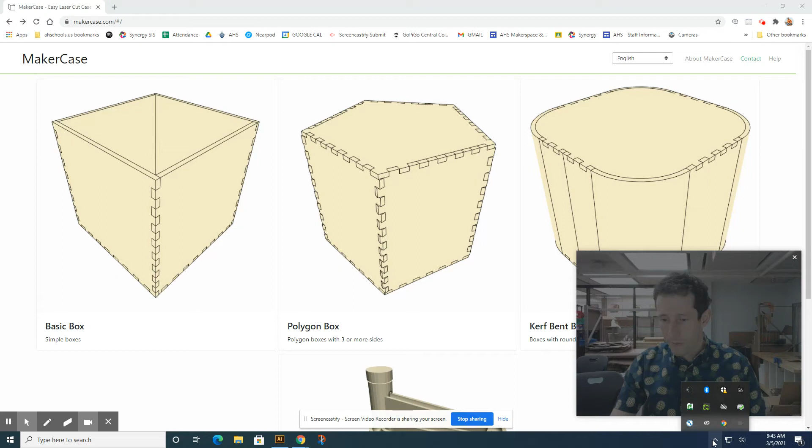All right, so ladies and gentlemen, what we're going to work on in this tutorial is figuring out how can we make a box, something like this, in a really strong way using these joints.

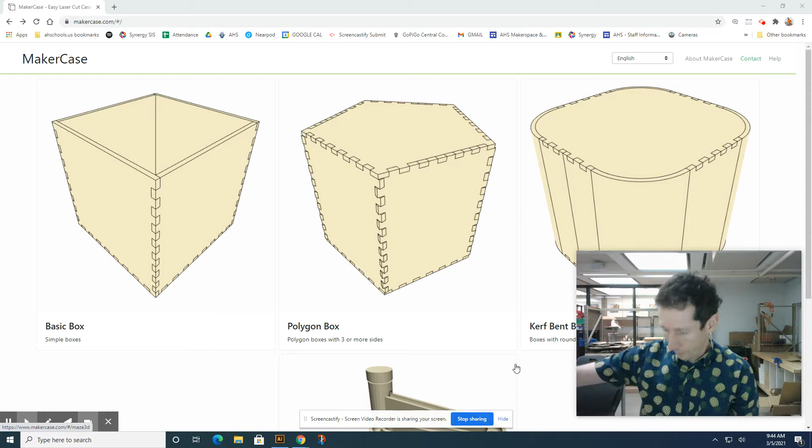There's a few different versions. But the key to this is by using joints, we can take these two-dimensional pieces and combine them into something that is super strong and sturdy. Now you could manually design these interlocking finger joints, totally, but why not use what's available? This website, makercase.com, automatically builds simple boxes, which is a great place to start. And it will build them to the dimensions that you want, and it will do different styles of joints. We are going to start out with just the basic box.

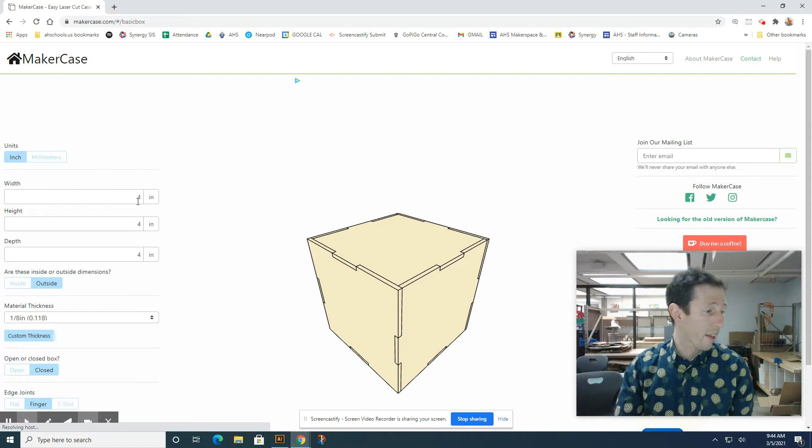So you want to go to makercase.com, you're going to get to this screen and you want to choose basic box. Now, the requirements for this module is to make a box that is 4 inches tall. So I'm going to change that, make that 4, width 3 inches wide, and then depth also 3 inches, so it's a rectangle. And you should see that responding right there in front of you. You can take that 3D model and you can move it around.

So we're going to use this program to build the basics, and then we're going to take this file and bring it into Tinkercad to finish it up.

Now, once you have the overall dimensions of the box, there's a few other features. The most important feature is the material thickness, aka if you're going to take a sheet of wood, a piece of wood, how thick is that material? Now we generally use 1/8 inch material in the makerspace, but you always want to confirm that. So 1/8 inch, there we go.

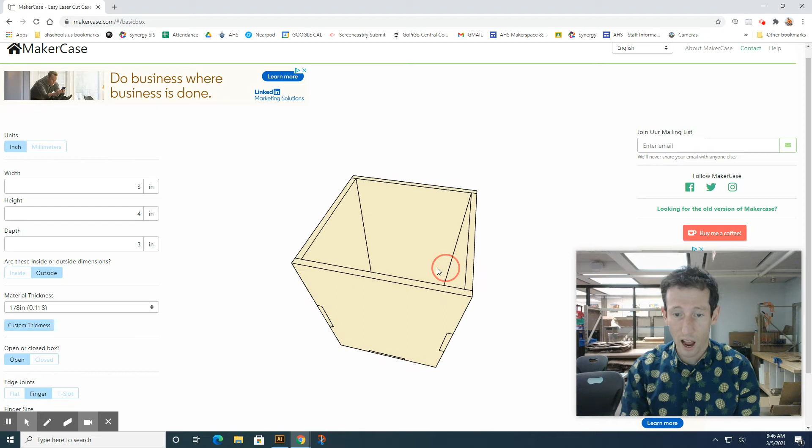Is this going to be open or closed? Now this is for the Glowbox. So the Glowbox, we're going to take upside down, we're going to set over a light source. So we're going to actually say that this is open, and you'll see how it automatically changes that design, getting rid of the top. And that means we don't have unnecessary joint slots added in.

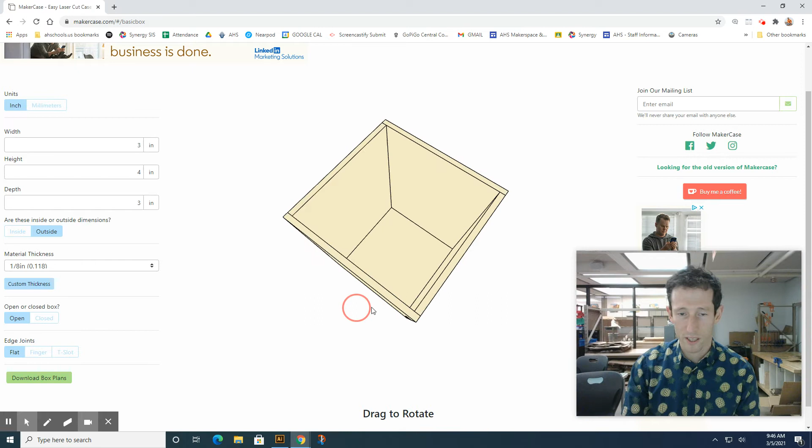Lastly, we're going to pick what type of joint we want. Now, flat joints, if I click flat, there's T slot. Flat, sorry, finger, right? And it's actually not letting me do flat because I was messing around with it before. So I'm going to click finger joints. That's really what we want, right?

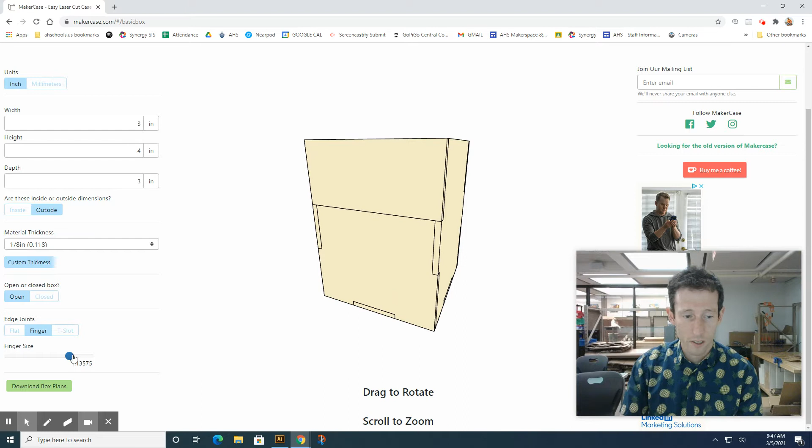And you can see it automatically changes the shape of the different features in 3 dimensions so that they interlock together. But what you can change is how big those finger joints are. And as you move this bar, the smaller they are, the more that you can put in there. So the question becomes, how many?

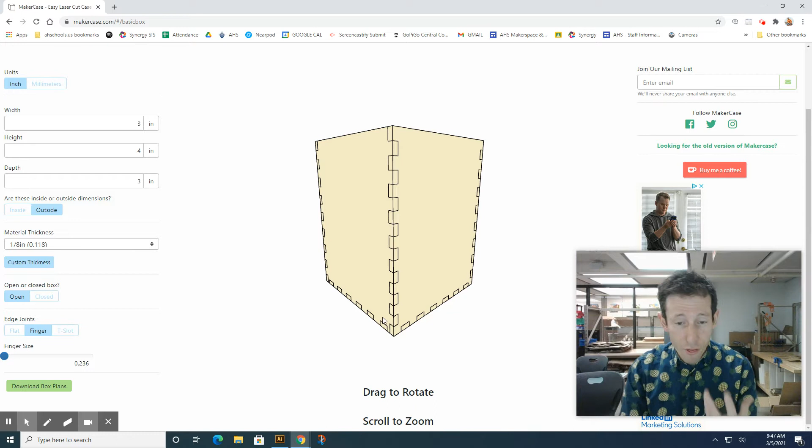Now, the more joints you have, the stronger your box is going to be. But it also means the more joints that you have, the longer the laser cut is going to take, and the thinner these pieces are going to get. So like right there, you can see this tiny little finger, that's going to be really thin. And the danger with thin pieces is that they more easily break and snap off.

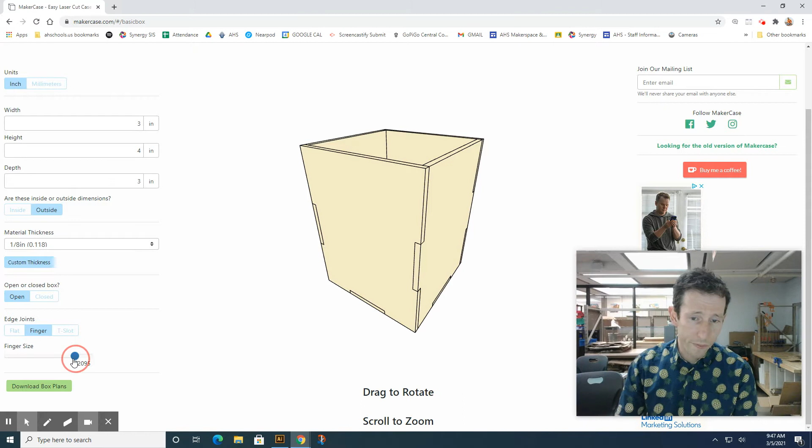Now, we could go maximum size, and that would work, but to be honest, you would get a very weak and imprecise box. It really wouldn't fit that well together. So you want to kind of hit the middle ground. I'm going to go with that, right? That's a good distribution, I've got 3 or 4 notches on each corner. That to me is going to be a really strong design right there.

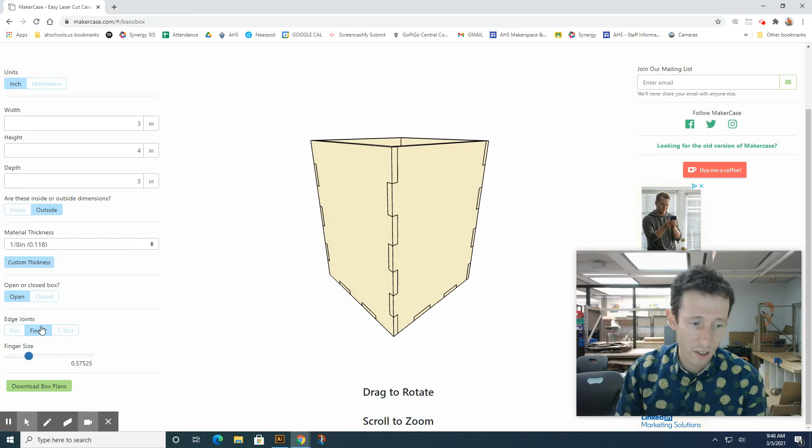Once you've established your settings and the number of joints that we're going to have, then you can go ahead and hit download box plans.

So this is what it's going to actually create, and again you have a few options. Now, they are automatically putting in labels. We don't want that when we send this to Tinkercad, so I'm going to go ahead and say disabled. And we don't care about the label colors because they're gone.

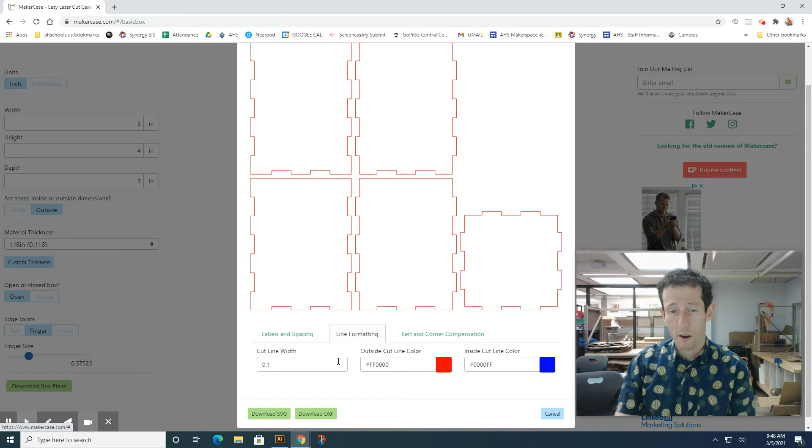Do we want them to be separate? Yes, definitely, we need there to be space in between them. Okay, next, line formatting. Line cut width 0.1, that's fine. If we were going to actually send this to Adobe Illustrator, we would change that to 0.01, so I'll do that, it doesn't hurt. And then inside versus outside cut.

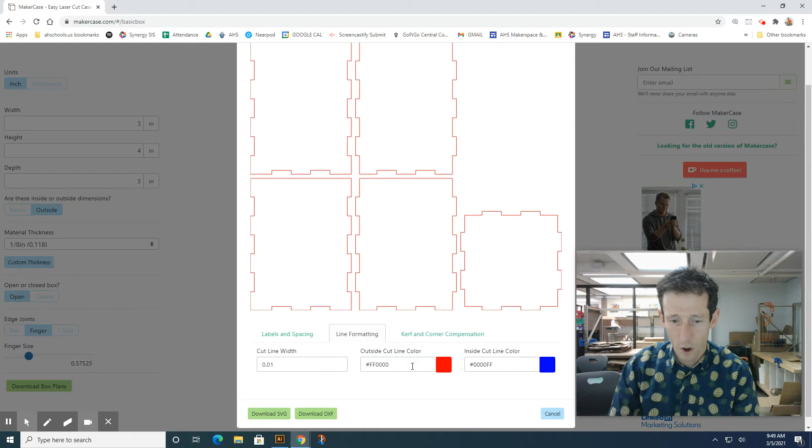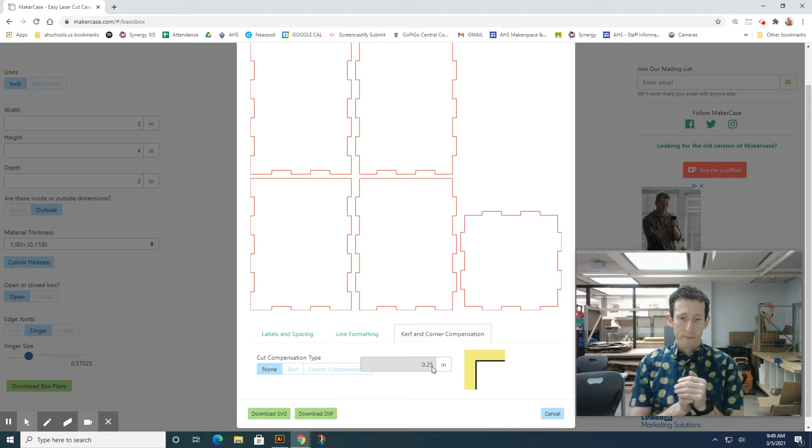That line, the colors don't really matter. If we wanted to, we could just do black. Did that work? No, it didn't work. Yeah, that's not a huge deal because we're doing such a simple design. And kerf and corner compensation. This is where we decide how much space we leave where the joints interact with each other, if that makes sense. You can just leave that where it's at.

So now this is the file that we need to export, and we're going to export that as an SVG. Go ahead and say download, and I'm going to name this test box, and I'm going to save it actually on my desktop so it's easy to find. So I'm going to say save.

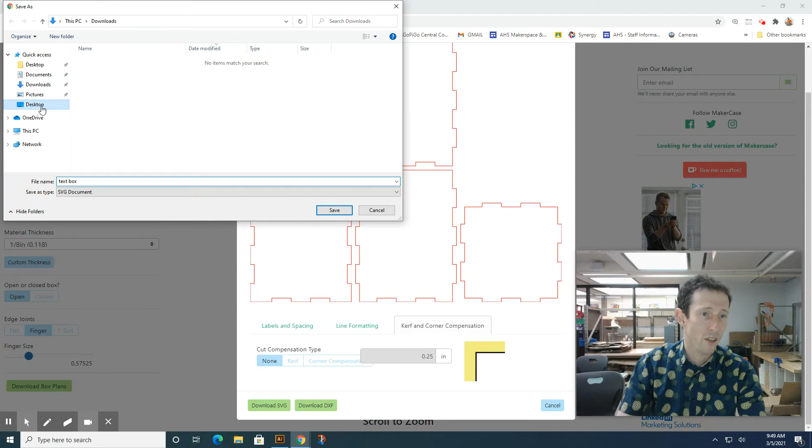Okay, now I'm going to go to Tinkercad, and I'm going to log in. Oh, not join, sorry, my bad. Sign in with Google. It's my school account. Okay, and I'm doing a 3D design. I want a new 3D design, so I'm going to create new.

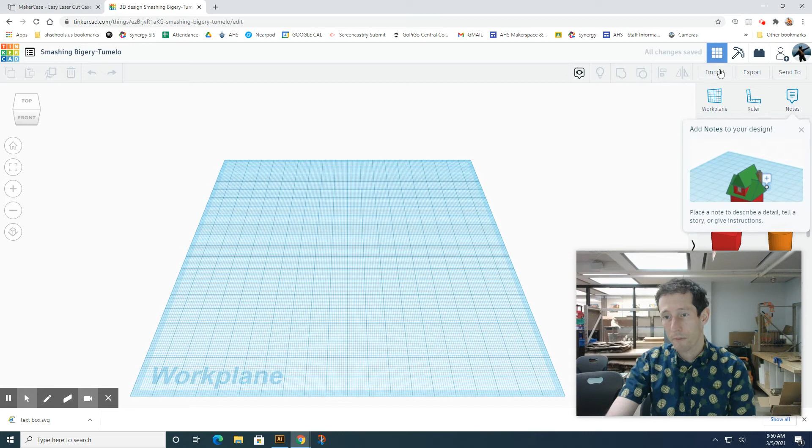Okay, and I'm going to go to import, and I can say choose a file. I can also, I think because I have it here, I can just drag it. Center on artboard scale, that's fine, go ahead. And give it a second. Okay, and there it is.

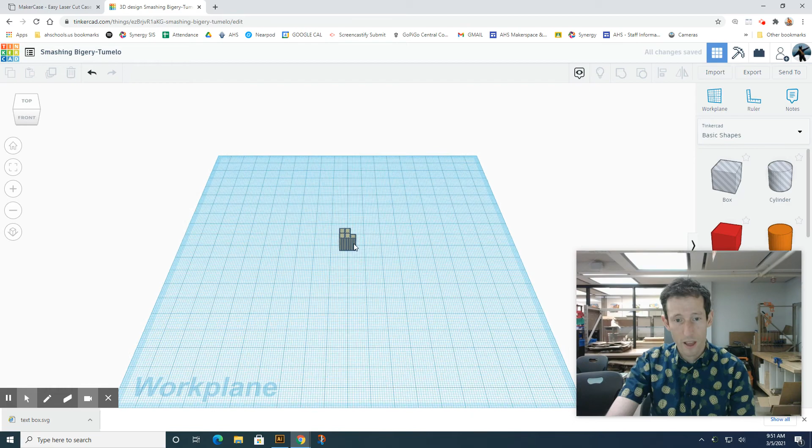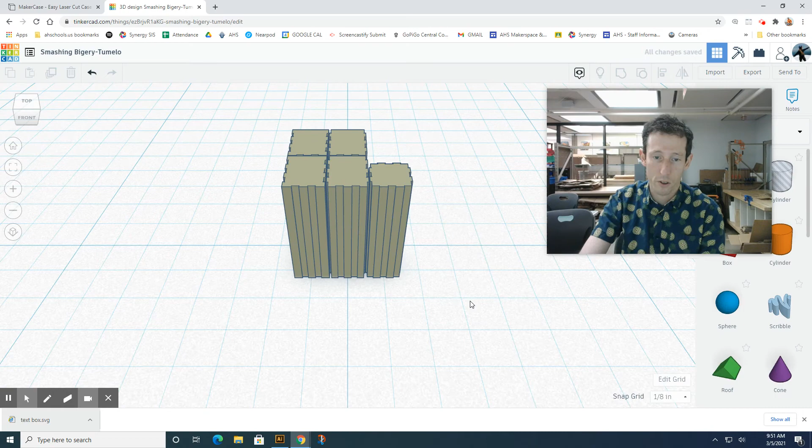So what I'm going to do is change that to inches. I'm going to say update grid. Actually, I'm going to go ahead and delete that design, and I'm going to re-import. Import that in. Nope, it doesn't like that. All right, so it's just going to keep it.

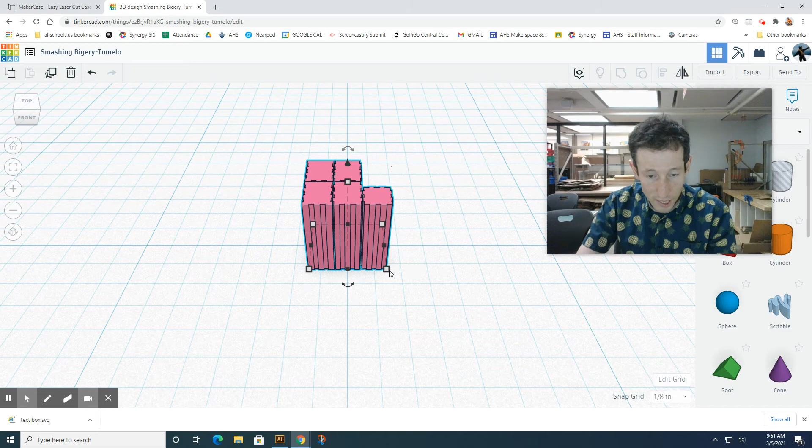That just means that I need to size this up. And so I can resize, and let's see, the key is that I am making this scale uniformly. So I can't just move one, I've got to move them all, and I have to move them equally in both dimensions, the X and the Y.

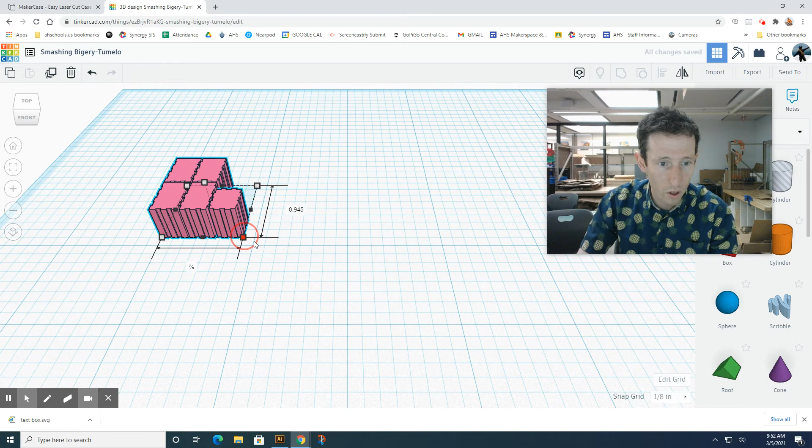So here's what I'll do. I know that I want each of these pieces to be 3 inches. So what I'm going to do is hold Control, and hold Shift, and scale it until I see one of the pieces—so I'm watching this left piece get to 3 inches across.

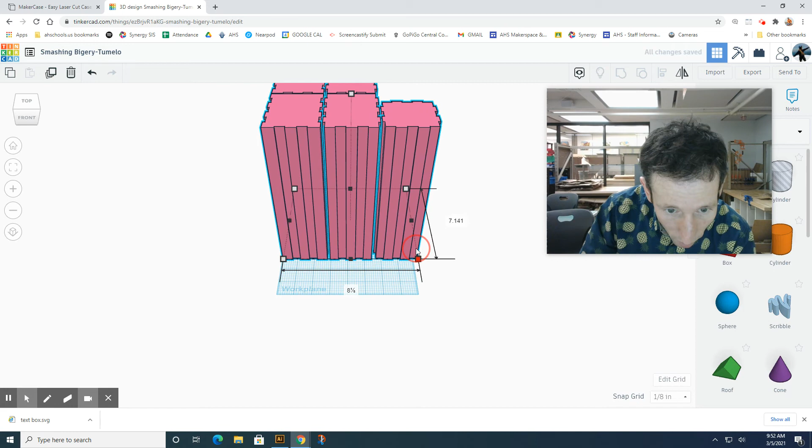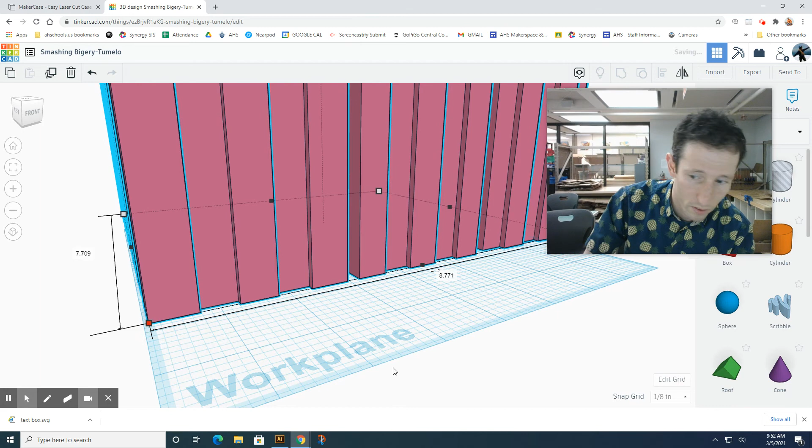Right, let's zoom in, say I need to go a little bit more. Okay, so what I've done is watch this corner, this piece, and it should be 3 inches across in this direction. I'm going to rescale, get that side. Okay, I need to change my snap grid to 1/64.

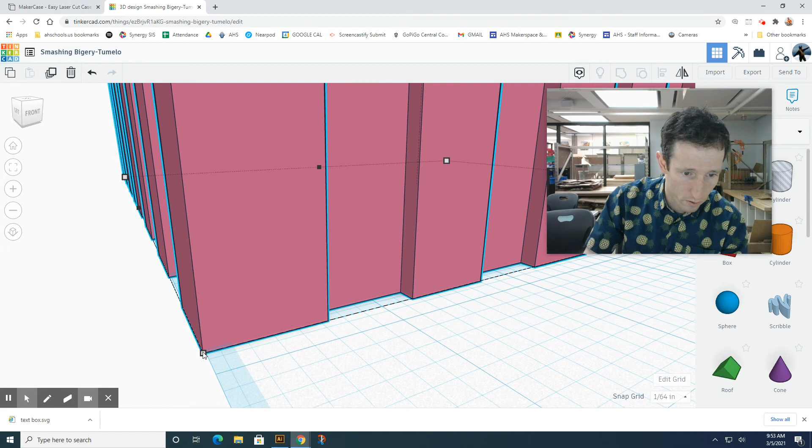Pretty darn close. Well, let me check the other corner. Okay, and let's say... No, all right, so that's close enough.

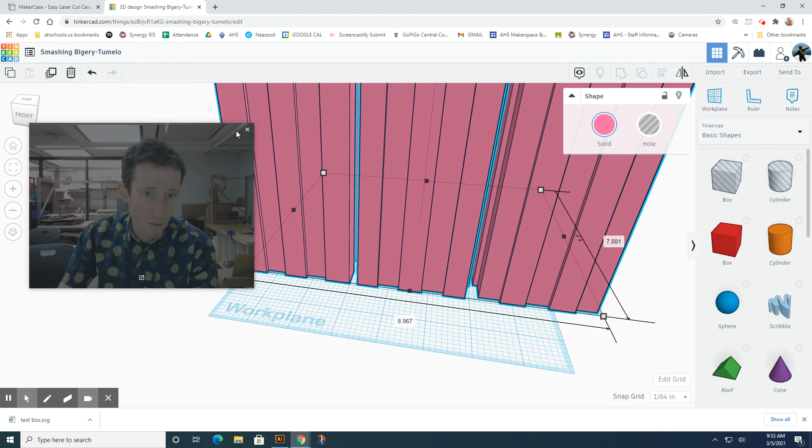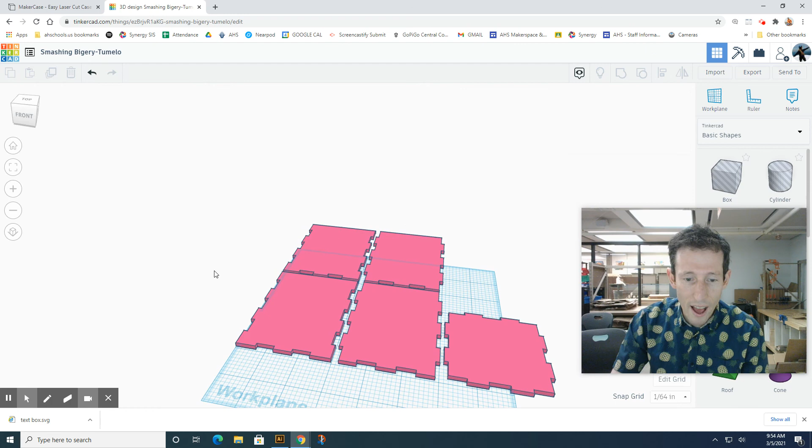Now, of course, I am laser cutting, I'm not 3D printing this, so I can shrink this down. Ooh, wrong one. I'm going to click that, and point 1, 2, 5 — that's 1/8 of an inch, I think. All right, so that's what my box will actually look like.

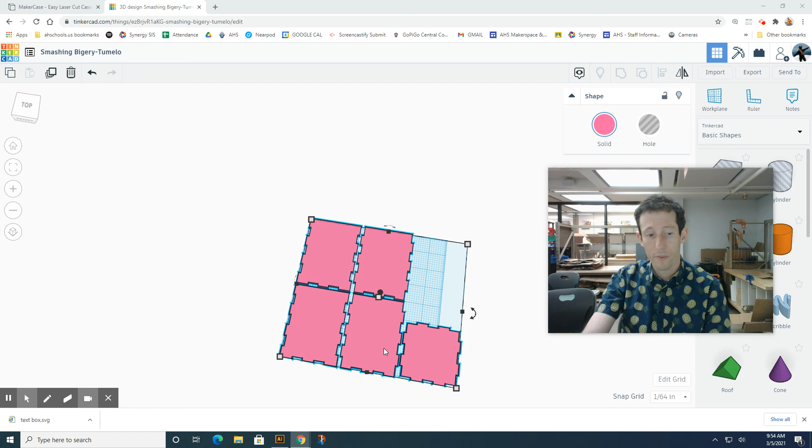Now, I have my box design in here, and it doesn't matter that it doesn't fit on the blue board there. Now I can go ahead and start putting designs into the different pieces. And when I'm all done, I'm going to take this whole thing and export it as an SVG so I can send it to the laser. All right, make it happen.